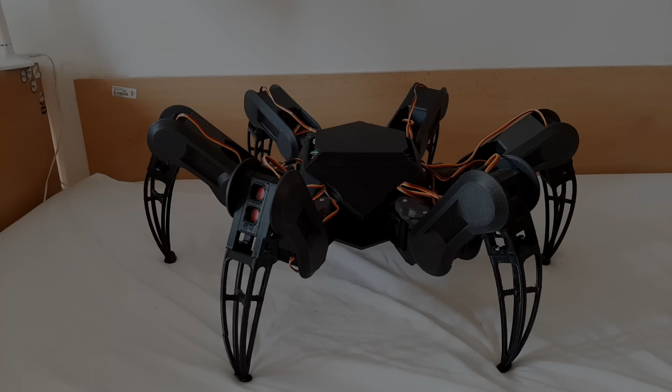This is the first robot I ever built. It's called Hexapod because it has 6 legs which allow it to walk in tough terrain. This robot took me a whole year to build, which is why it's one of the best hexapods in the world. Or maybe not, but it can do some cool stuff anyway.

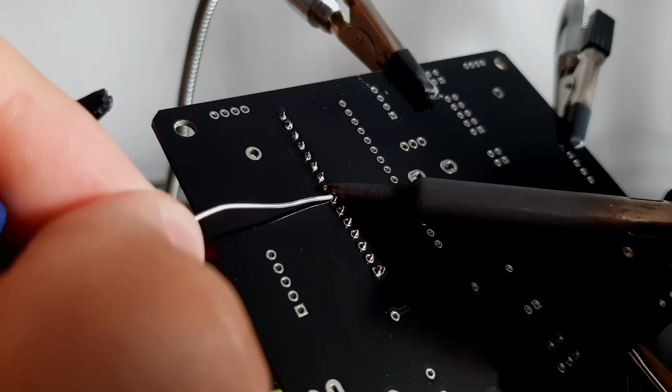I'm gonna show you the journey of this robot from day one. The mechanical engineering and electronics. You'll see the highlights, and there were even a few mistakes along the way.

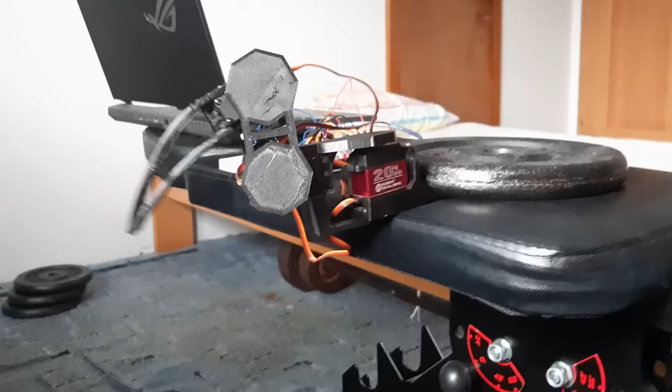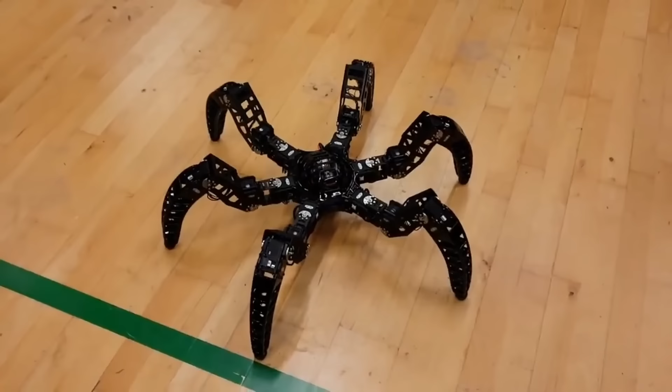Now, let's build a hexapod robot. At day 1 of the actual build, I had an optimistic view. In the next 2 months, I'm going to build a hexapod robot that's going to climb walls like a spider. This estimate turned out to be inaccurate.

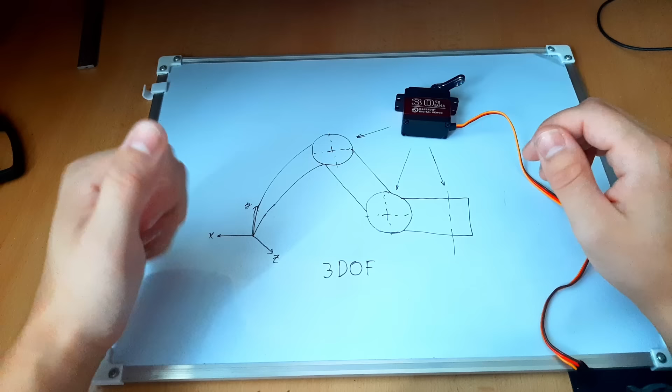I started by designing a single leg. It's gonna use 3 of these servo motors. This is the minimal amount because you need at least 1 motor per each axis it's gonna move along. I opened up Autodesk Inventor, which is a CAD software for 3D modeling.

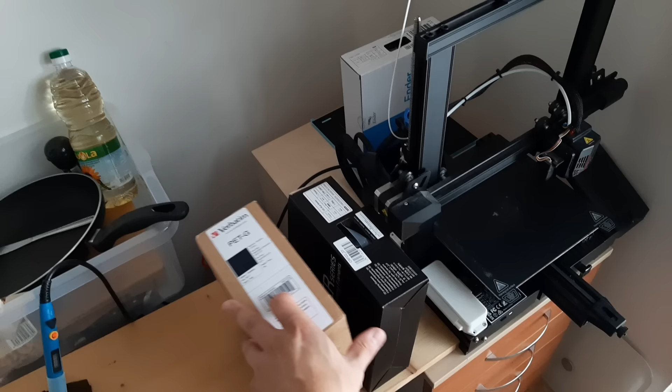After finishing my shitty model of the leg, I exported it as an STL file and opened it in Cura. I set the infill to 20%, saved the G-code and started printing. For the material I chose PETG because it's stronger than PLA, or at least so I've heard.

I glued all the pieces together and coded a basic movement. I coded the movement in angles, so the leg doesn't move straight. And I also fucked up the CAD, so one of the axes is crooked. But that doesn't really matter because it was just a prototype.

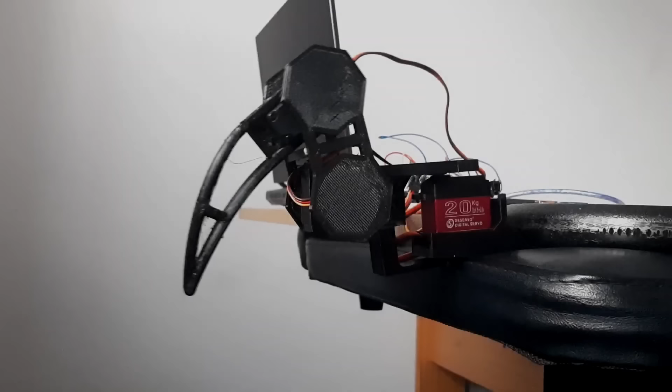At day 5, I focused on the inverse kinematics, and I'll let past me explain what that is. I built this one leg, which is made from 3 servo motors. I can set the angle of each motor and the leg will move to some position. This isn't very useful since the movement is essentially random. What I want is to tell the leg to move to some position and let the robot figure out the angles. This is called inverse kinematics.

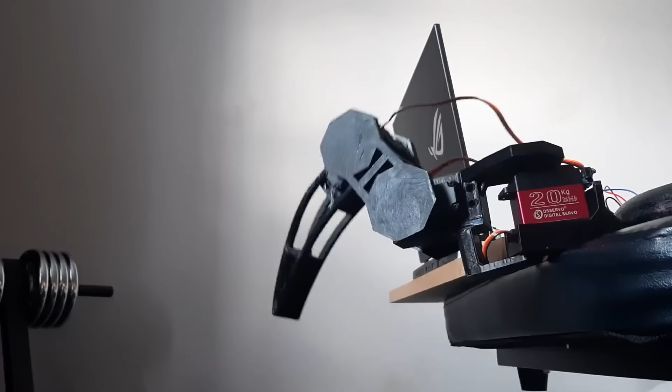I solved it by writing down the equations and transferring them into code. I can now move the leg in the X, Y, Z or any other direction I want. I have IK as a function in my code, which translates the X, Y and Z into theta 1, 2 and 3, so I can code the movement of the leg in spatial coordinates and the code translates it to the joint angles.

Since I could easily code the movement of the leg, it was time to make the leg path. So far I've built one leg which can move in the X, Y and Z axis. My aim is to combine these movements in a specific way which allows the robot to walk. I could let the leg trace out a triangle like this. The problem are these sharp corners. The leg is moving in one direction and I'm telling it to move the other way the next millisecond. This causes the motors to overload.

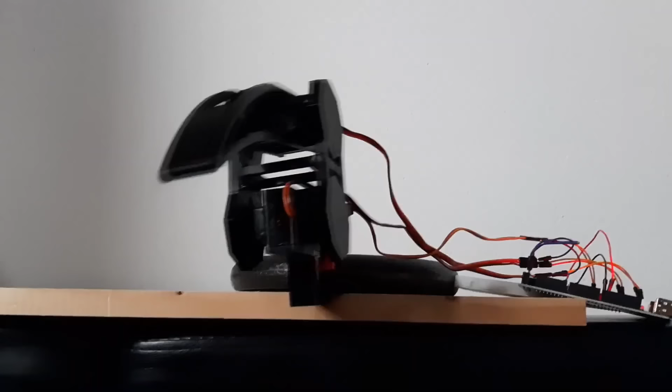Instead of a triangle, I am using this smooth path which is called a Bezier curve. This curve is C2 continuous, which roughly means that the force acting on the leg changes gradually and not abruptly. This makes the leg movement smooth and doesn't wear out the motors. In just a week, I had made a full working prototype of the robot's leg.

So at day 12, it was time to design the rest of the robot. By this time, I had already ordered another 15 servo motors.

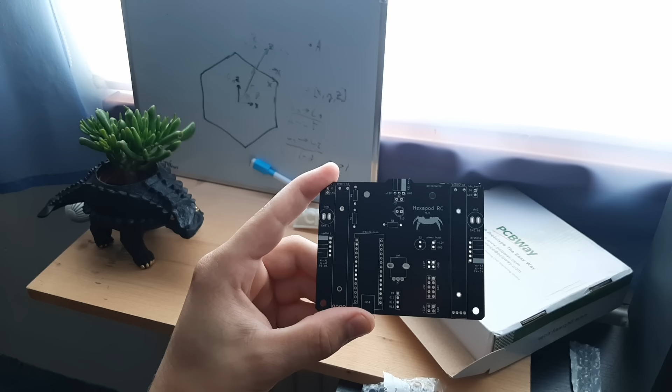The modeling took me 5 days, which sounds like a lot, but this assembly has 150 parts and they all have to fit together. This is the body of the robot where the electronics goes. I wanted to make the robot as small as possible, but it ended up being over 70 centimeters wide and now it barely fits through the door.

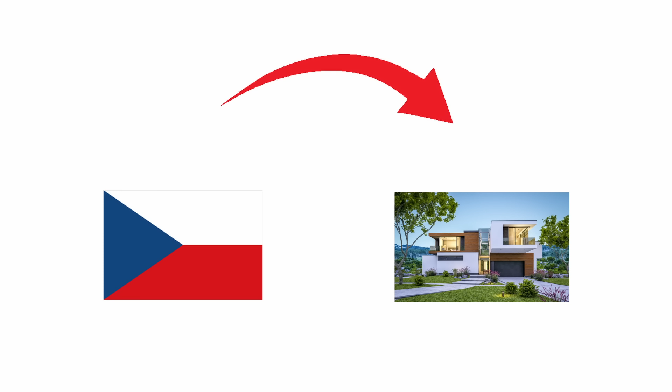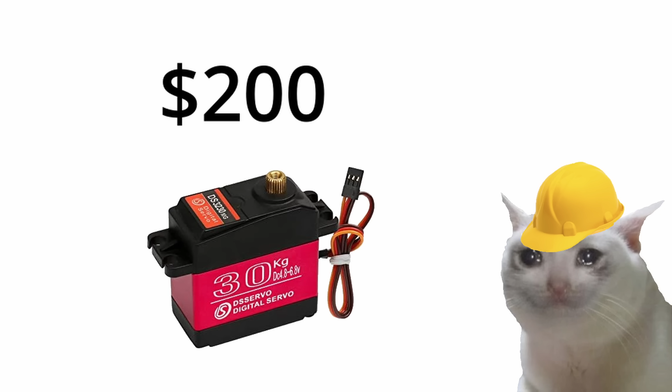34 days later, I was still waiting for the motors. You see, AliExpress ships the order to your country, this is fine, but from there it gets delivered to your home by a local delivery company. Which means I'm fucked, because in my country, the delivery company is this piece of shit. So I was just praying it would get delivered sometime, because I spent $200 on the motors.

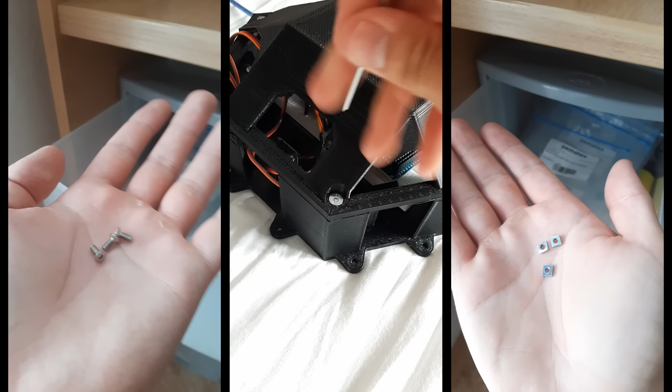While I was waiting, I printed the body and a single leg. I chose ABS because the PETG I tried before wasn't rigid at all, and ABS should be even stronger. I joined the parts together with bolts and square nuts because I didn't know that heated inserts exist. I was happy with how it looked, but it was really heavy.

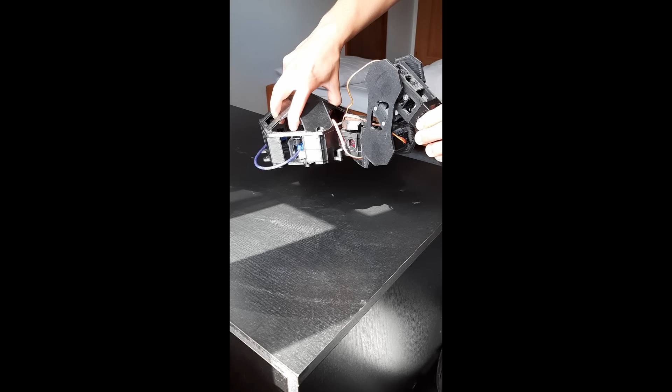I redesigned the tibia, which is this part, to add a greater range of motion. I attached the leg to the front of the robot, so I had to rotate the leg path by 60 degrees. I did this by adding 60 degrees to the first joint, which wasn't ideal since it rotated the path around that joint instead of the center of the leg path.

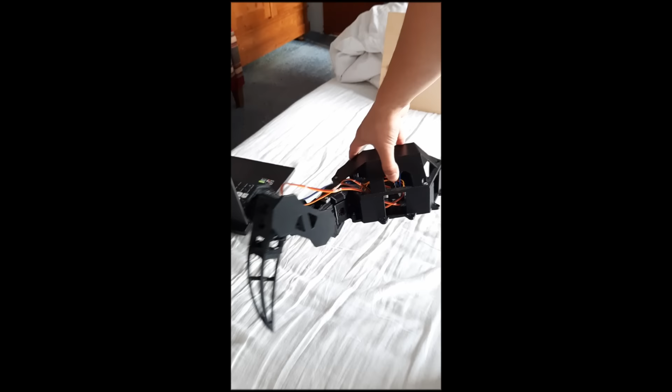I was starting to lose all hope, but at day 62, 2 months after I had placed the order, the motors finally came. I replaced the old ones, printed some new parts and assembled 2 more legs. I updated the code so it generates 2 more paths for the added legs.

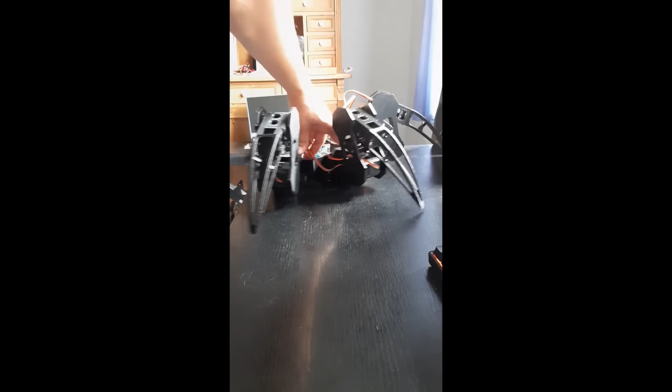I tried powering it with the notebook, but the motors draw too much current, so I had to switch to LiPo battery already. The 11-volt battery is connected to a buck converter, which reduces the voltage to 7 volts, which the motors need. I also added a switch for the battery. Next, I will properly write a code for turning the robot while printing the remaining 3 legs. Yeah, this was a scam.

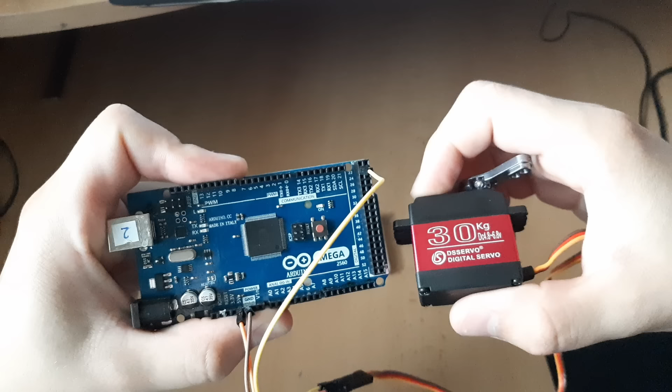Since the robot had 3 legs, I had to upgrade the power supply. Before I was using a notebook to power the Arduino, to power the breadboard, to power the servo motors. But the Arduino 5-volt pin doesn't have enough current to support 9 servo motors, so I switched to a LiPo battery. Day 95 was a pivotal moment. It was the first time I made the robot walk.

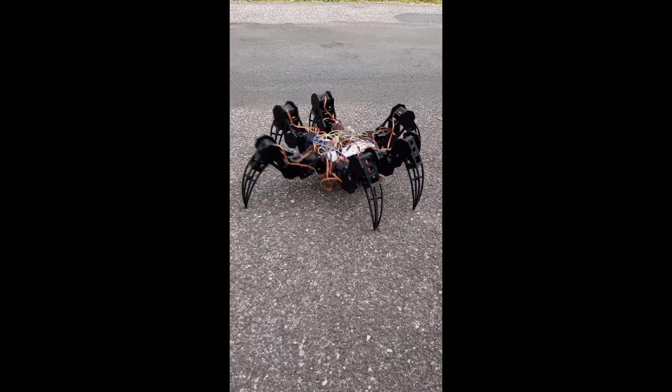I was at the hospital for the last month, but I managed to assemble the remaining 3 legs. I wrote a code to make them move and tested it. Then I printed a stand for the robot, so I can test all of the legs easily. Since I finished all the legs, I let the robot take its first steps. The robot only walks forward. It has no control system or sense of the environment yet.

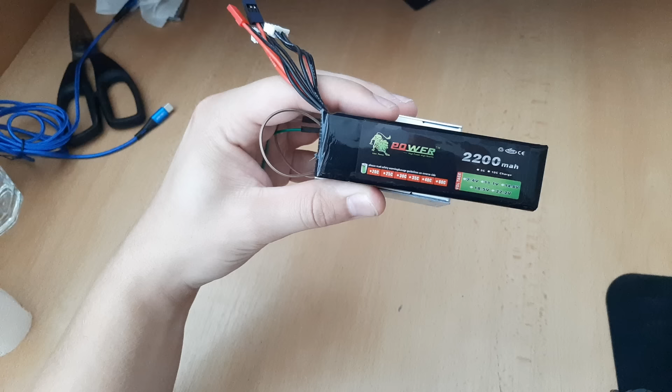It walks slowly and takes small steps, because I miscalculated the power requirement. I already ordered a battery with lower voltage, so I don't have to use the buck converter, which only provides 15 amps. The battery has plenty of power, but the buck converter has a maximum current of only 15 amps, which is barely enough for the robot to walk. The motors would also start moving randomly, or they wouldn't move all at the same time.

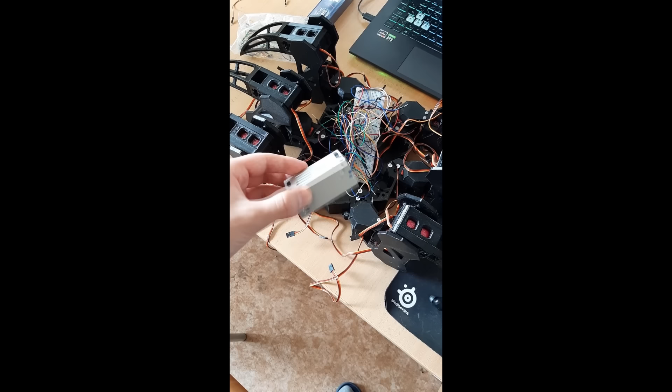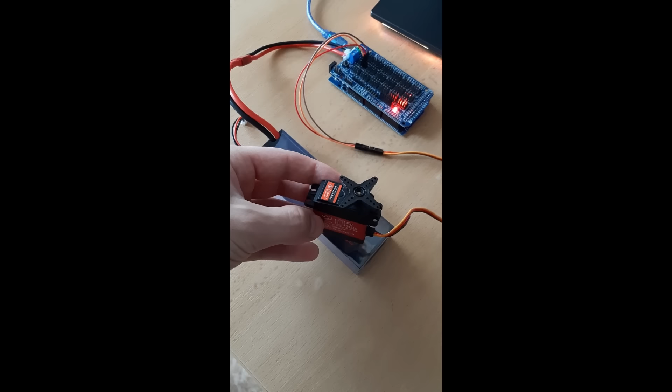At day 112, I improved the electronics. The old robot didn't have enough power, because I was using a high voltage battery with a buck converter which didn't provide enough current, so I had to redesign the circuit. I bought a 7-volt battery and connected it directly to the motors, so I don't need to worry about not having enough current. Next, I changed the breadboard for an Arduino shield, which lets me connect all of the motors easily. I also soldered a flyback diode and a capacitor on the Arduino for more stable power supply.

Now the robot can walk faster and take bigger steps. In the next video I will write a code to make the robot run and maybe add a remote control joystick. The sensor shield I added has the power, ground and digital pin next to each other, which makes it easy to connect the servos.

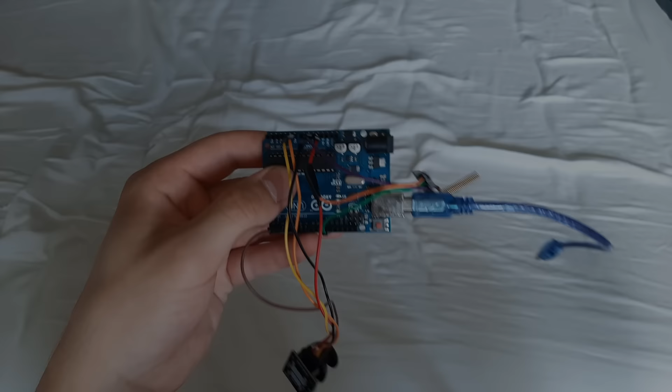Now there's still one thing I haven't talked about yet. Pretty much from day 1 I was working on a remote controller behind the scenes. I bought NRF24 chips and a HC05 in case the NRF didn't work. I assumed this was gonna be pain, but I wasn't prepared for what was to come. After weeks of work, I managed to make a transmitter with an Arduino Uno, 2 NRF chips and a joystick.

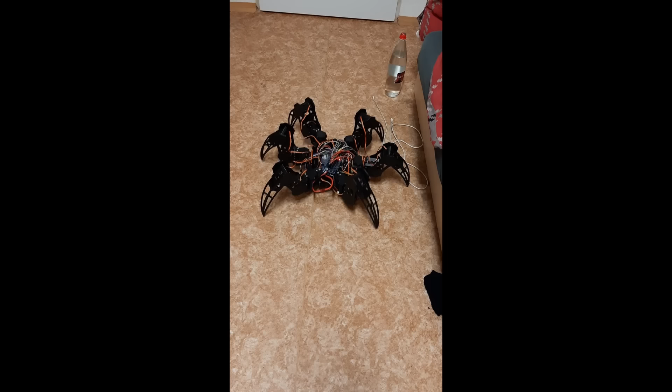Up to this point, the progress was fast. It might have taken me 100 days to get here, but I spent most of the time waiting for the motors to arrive and being in a hospital. But from this point on, it all started going downhill, and I wouldn't upload for the next 250 days.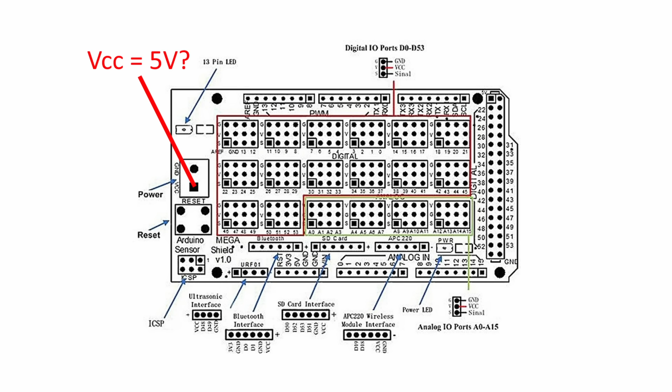The wireless communication was abysmal. It almost never worked and I had no idea how to fix it. I tried some tips from the internet, but none of them helped. Then the sensor shield blew up. I realized it was supposed to be powered by 5 volts, so it was completely useless in my case. I looked for a shield that could power 18 servomotors, but couldn't find one.

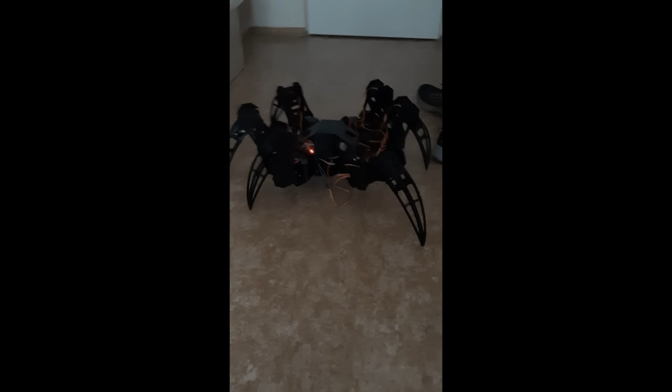On top of that, the robot started falling apart, because the 3D printed parts from ABS weren't strong at all. This meant I had to reprint the entire robot. Those were major issues, and since I wasn't even sure if I could fix them, I considered not finishing the robot.

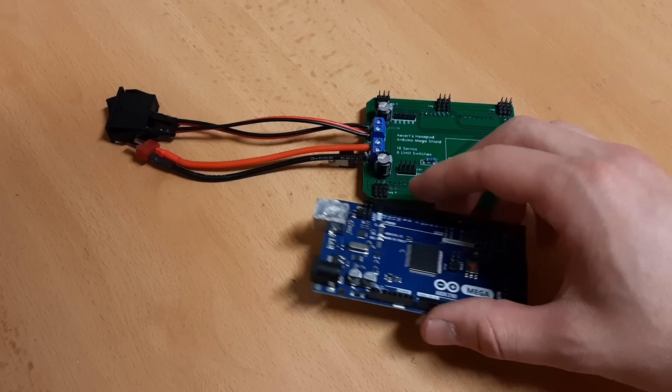But I decided to keep going. I went full sunk cost fallacy and spent a bunch of time working on the robot. I decided to make my own shield with a custom PCB, but since Aecert has already made one for his Hexapod, I just ordered his PCB and soldered it. I started reprinting all the parts with PLA and upgraded the robot's code in the meantime. I added foam to the robot's feet to prevent them from slipping.

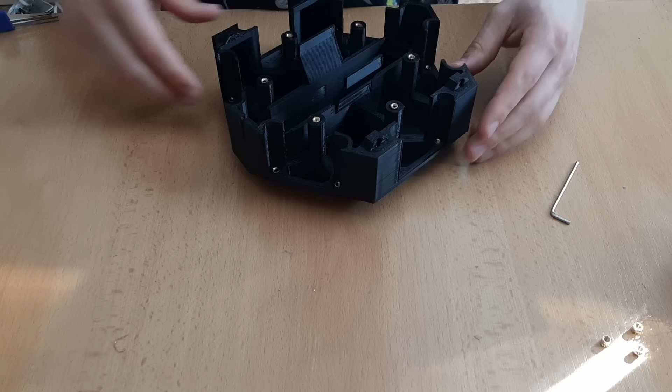I got fucked over by the delivery company even harder than before. I started using heatset inserts for the bolted joints. And I redesigned the robot's body. I spent most of the time trying to fix the wireless communication, but I was out of luck. With the newly printed parts, I was able to ramp up the speed and get a decent performance.

I got to a point where the robot was kind of working, apart from the remote controller. So I did some more coding and created a video showcasing the upgrades.

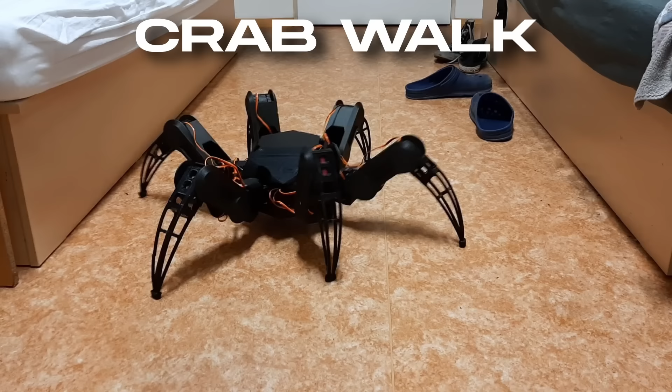Since I finally had something to show, this marked the end of my 200-day pause and I started recording the progress on YouTube again. I even managed to get the remote control working, but ever since I made the robot stiffer, the legs started vibrating.

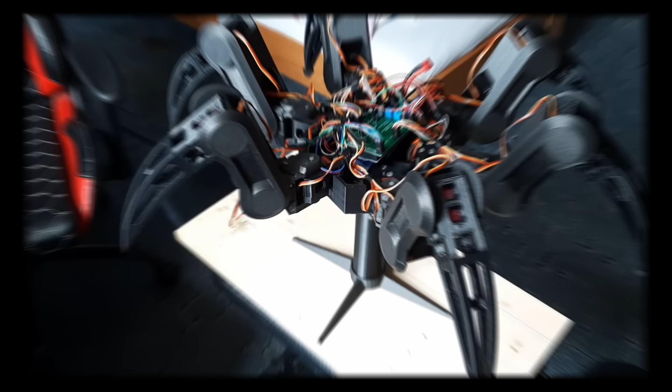So this was the focus of my new video at day 377. This is my robot I've been working on for the past year. When it walks, the legs just start vibrating like crazy and he looks like he's about to give a presentation.

To reduce vibrations, I added friction caps to the main joints. Unfortunately, they weren't strong enough. The square shaft kept breaking, so I made it bigger. This meant I had to redesign other parts as well.

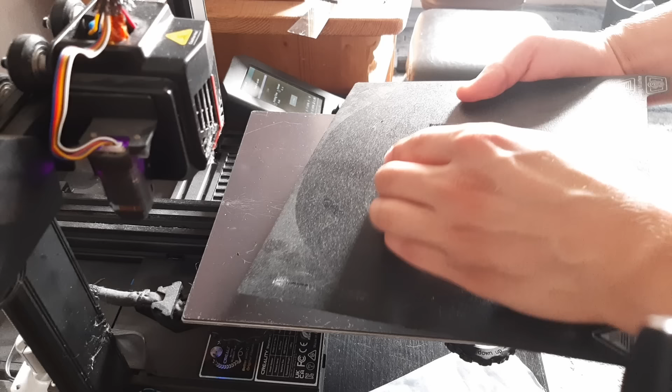And because of my shitty design of the robot, changing the parts was pure pain. I have to disassemble the whole leg just to change these 3 parts. And eventually I'm gonna have to do this for all of the legs, so it's gonna be super painful.

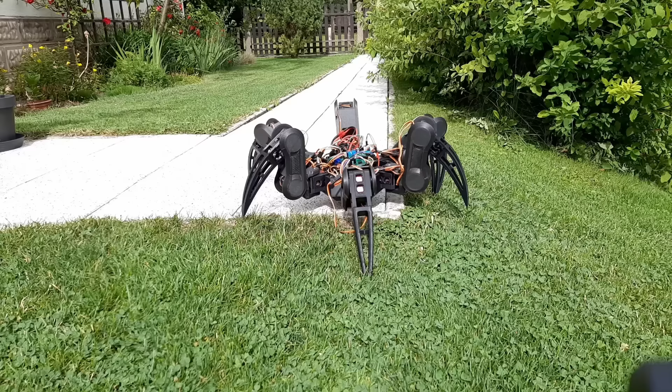Testing the new friction cap went well, but a different issue emerged. These feet are terrible. They dig into the ground and also slip. I originally had a piece of foam at the end, but it wasn't strong enough.

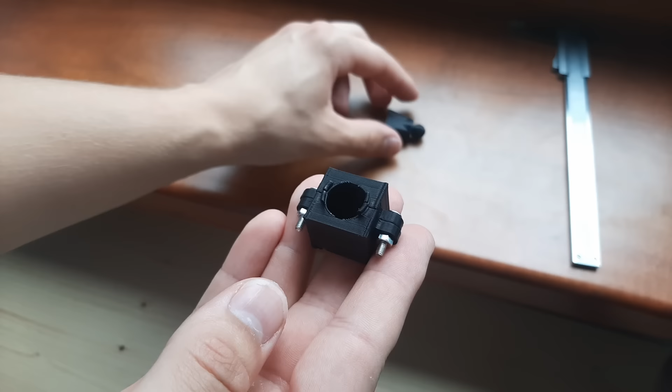I decided I was gonna make new feet from silicone, so I printed this 2-part mold. The silicone is made by combining 2 parts, A and B, and I just realized that my part B is hardened, which it shouldn't be, so I'm just gonna dilute it in some alcohol and see if it works.

So, as I said, I'm just gonna crush part B into powder. It looks like it's getting solid, so I'm gonna pour it into the mold and hope for the best.

Unfortunately, it did not solidify, so I ordered new silicone.

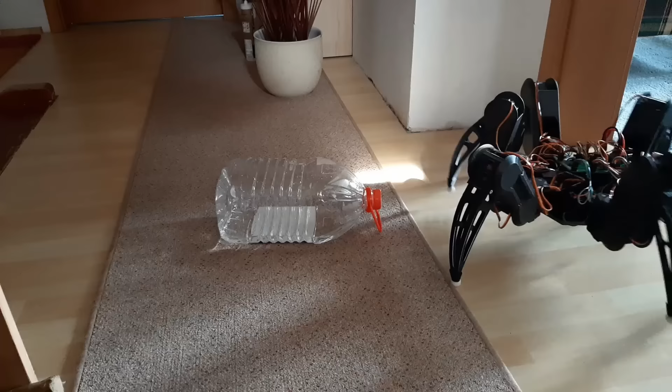With the vibrations sorted, I wanted to make a remote controller, so I made a prototype at day 393. I've been making serious progress on my robot, although I haven't upgraded the remote controller yet. This is mainly because it's perfect, but I'm gonna make some minor adjustments nonetheless, and with them the robot should be able to do some interesting stuff.

I started by making a sketch and choosing which controls I was gonna use. Then I made a CAD model of the controller, printed it, and started assembling the parts.

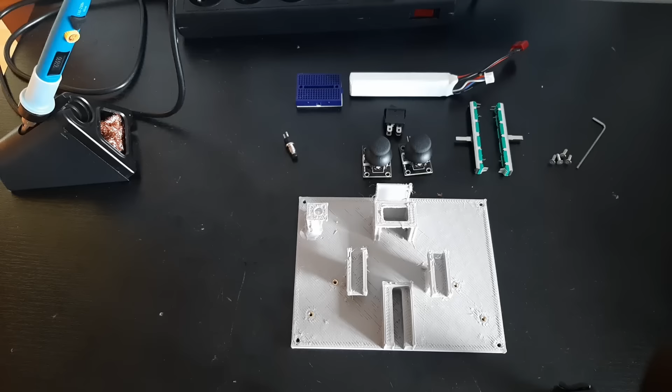Both of the joysticks are bolted to the base plate, the two sliders click into place, the button is bolted, the switch and the battery click into place, and there's a breadboard in the middle.

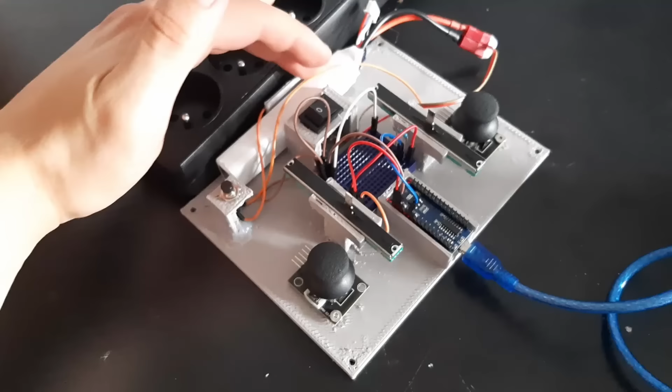Alright, the easy part is done, now I'm gonna wire up the electronics. I connected the battery through a switch to the Arduino. I added a button for changing the robot's gait. I wired up two sliders and two joysticks to control the robot's movement. And I added a 433 MHz transmitter.

If this isn't the best looking controller you've ever seen, I don't know what is.

After a few painful hours, I managed to connect the robot to the transmitter. You control the movement of the robot with the right joystick, and with the right slider you control the height of the robot. If you move the left slider, you control the radial distance of the legs. Now I'm gonna change the gait, and you can see he walks differently - he lifts the legs one by one. And now I've changed it back.

The silicone I ordered last video came, so I could finally finish the feet.

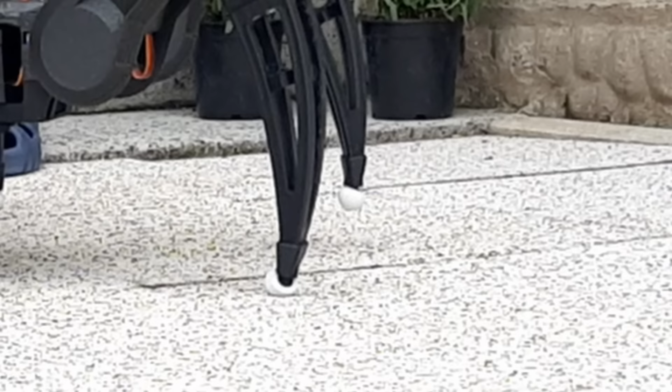Let's see how he walks with his new feet. Fuck.

At least my dog likes them. I applied super glue to the feet and they ended up working well.

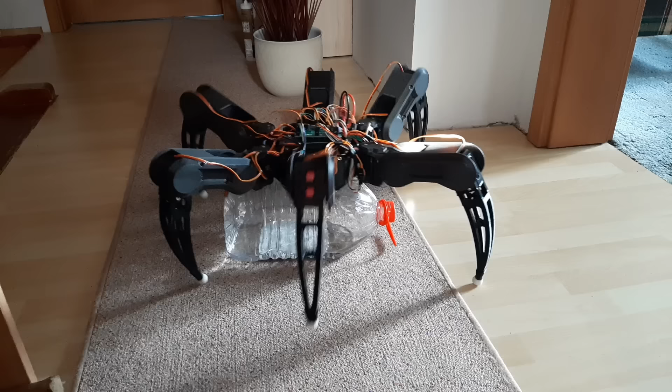At day 444, I added the most exciting update yet. Today I'm gonna take all my engineering knowledge and teach him how to high five.

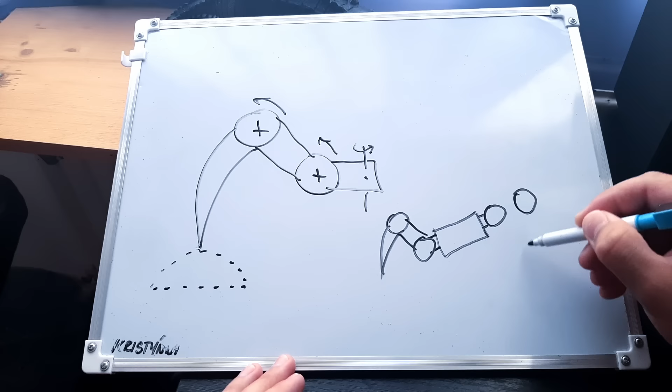Have you ever wondered how this robot walks? Each leg moves in a straight line, so the robot goes forward, and then it lifts up and returns to the starting position. I had previously generated the leg path by manually coding it, but now I was gonna do more advanced movements. I decided to animate the robot in Blender, so I didn't have to manually code each leg.

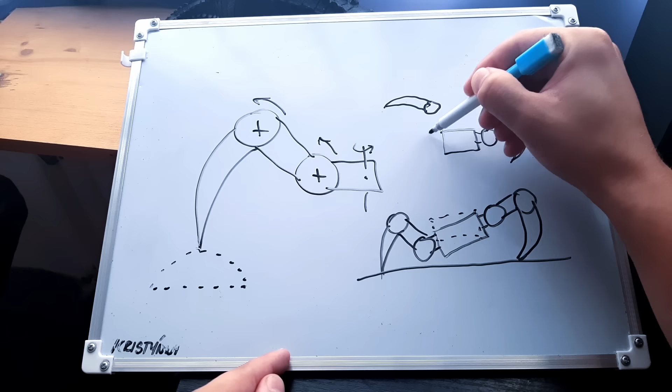To recreate my robot in Blender, I started with a leg. I first modeled the three links. I created an armature to define the linkage. I added inverse kinematics to make the leg move. Finally, I modeled a body and copied and pasted the leg 5 times.

Then I was able to animate the robot. You can keyframe the location, go a few frames into the future, move the robot somewhere, keyframe it again, and then when you play it back, the robot moves.

I made this animation, and then I wrote a script that saves the positions of the legs. It generates a text file with all of the positions. Then I just take this and paste it into my main Arduino code, load it to the robot, and it does exactly what the animation does. So instead of generating curves for each leg, I just do this animation and then paste it into the main script. I had planned to make the robot dance, but there was a difference between the simulation and real life.

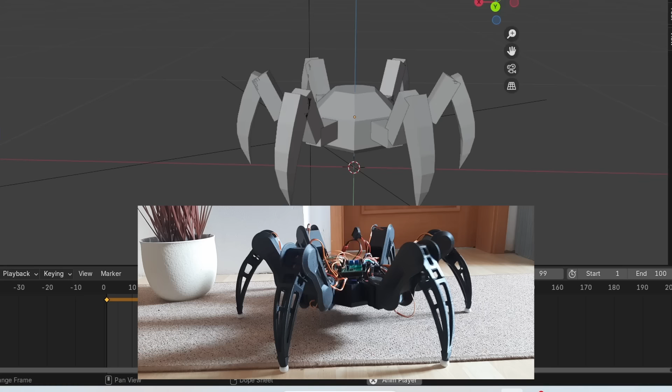So I opted for a simpler animation.

But there was still one thing I had to take care of first. I control the animations of the robot with this controller, and don't be fooled by the beautiful design, it's actually pretty shit. It only has one button and I need at least 3, so I'm gonna upgrade the controller and then I'm gonna make him high five.

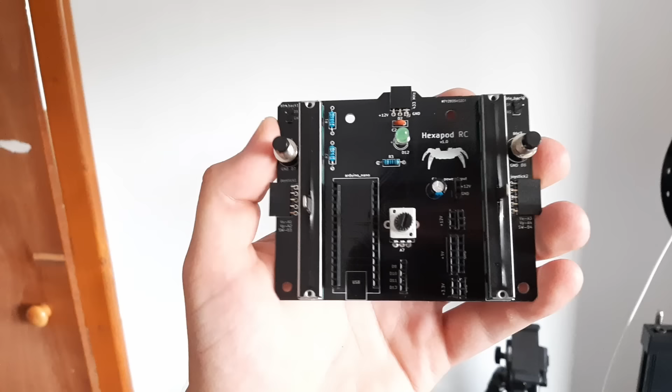These helping hands are great. Man, I hate soldering, but this is cool. Dope.

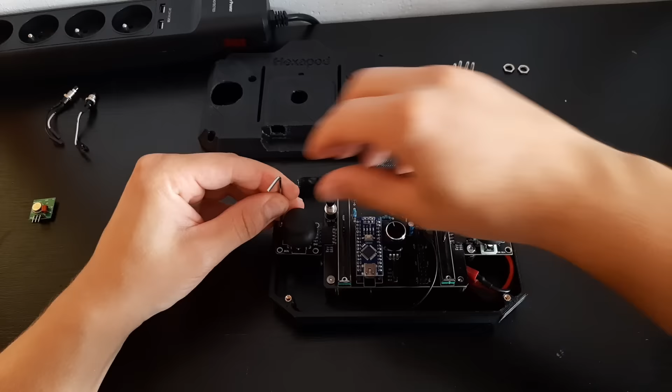Alright, let's make some animations.

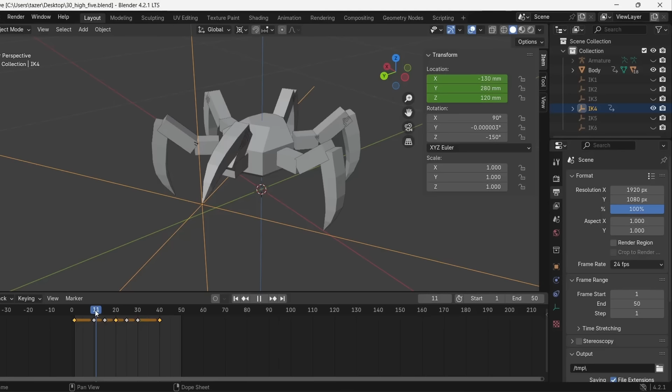For the high five, he just lifts up his leg, waits for the hand, and then executes the high five. To make the robot dig, he's gonna sit back like this, then dig into the ground with his two front feet.

Alright, let's have some fun.

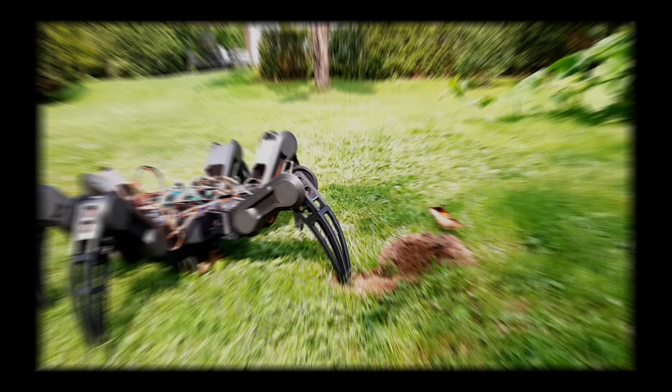It's been a long journey, but we have finally reached the end. These are the most recent clips I filmed when I took the robot shopping at day 440.

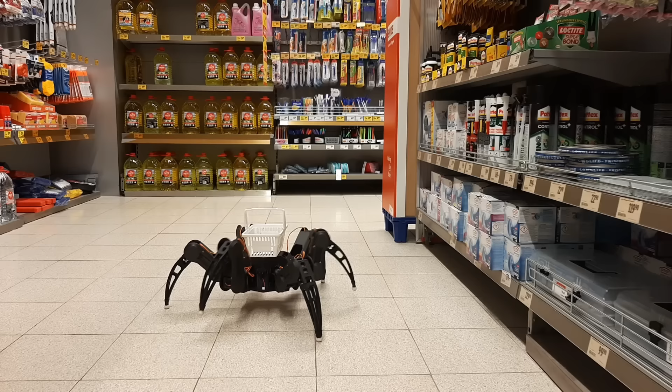This was my first time using an Arduino, 3D printing, and generally building a robot. It took over a year to build, and apart from some exceptions, I really enjoyed it. I planned to do so much more with the robot, but after some consideration, I decided it was time to retire it.

I'll explain why I retired the robot in my next video. Now let's zoom out, look at the biggest challenges, and what I would do differently.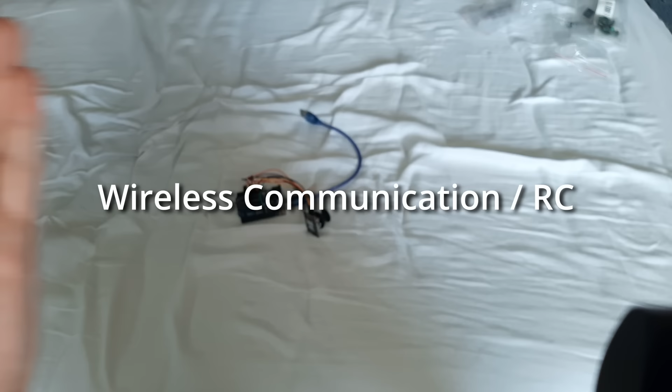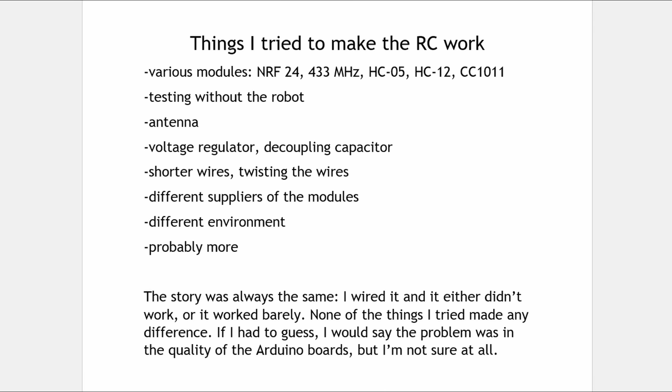Wireless communication. This was the biggest bottleneck of this project. I spent so much time on it that it hurts to talk about. The best I got was an RC that occasionally worked within a 2-meter range. I tried many things but never got it to work. I'll try using ESP now for my future robot since I've heard it's not completely shit.

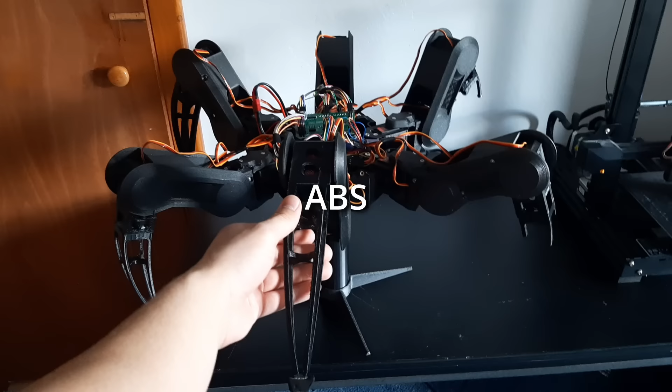Weight. The robot weighed 5 kilograms, which is 2 kilograms more than I had planned. ABS. I had printed the robot in ABS, which prints terribly on Ender 3. This paired with the high weight resulted in mechanical failures of almost all the parts.

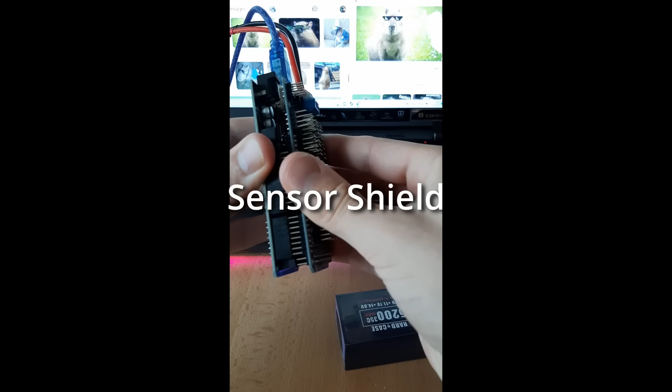Sensor shield. I hadn't checked the wiring diagram, which would have told me it wasn't usable in my situation. Non-iterative design. I hadn't tested the robot properly and built the first design I had in mind. I then had to reprint the entire robot.

Modularity. I had designed the robot to have as few parts as possible. Then, when I needed to change one part, I had to take apart the whole robot.

Hexapod's PCB. There was a short circuit somewhere in the Hexapod's PCB, so I couldn't upload the code when the PCB was connected to the Arduino. This made it a nightmare to code the robot. Vibrations. The servos vibrated a lot, which caused the bolts to unscrew.

Compliance. The robot had no compliance, so when the robot's leg caught something, the servo broke. Upper body. I had put the cable holes in the upper body, so when I wanted to open the robot, I had to take out all the cables first.

Now I'm gonna talk about what I've learned and some tips I would have used. When prototyping, design everything as simple as possible. You can improve the aesthetics and optimize once you have a working prototype. Make the design modular so you don't have to disassemble the whole robot to change a single part.

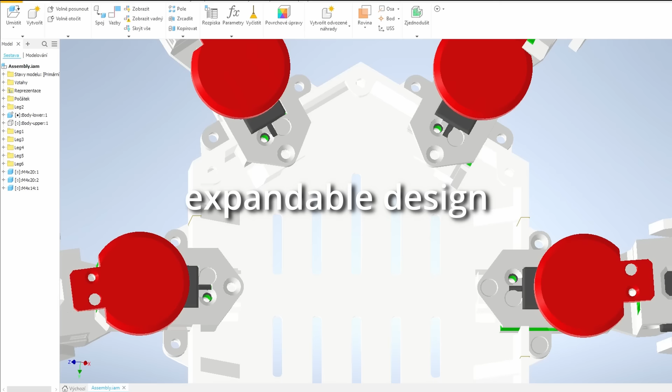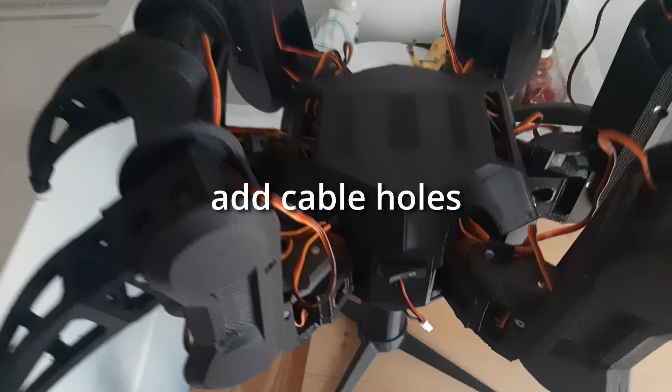Make the design expandable. For example, add mounting holes for attaching things in the future. Make it easy to access the main parts like motors and the electronics. Add a hole for the Arduino cables so you can code the robot without disassembling it.

Don't print in ABS if you don't have a printer for it. Use thread locker to prevent bolts from getting unscrewed.

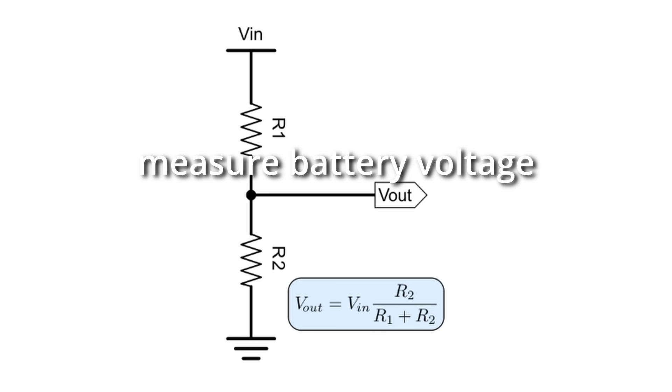Make a voltage reader for your battery first, so you won't destroy it by draining it. Make custom PCBs. You'll save yourself time and have the electronics more ordered.

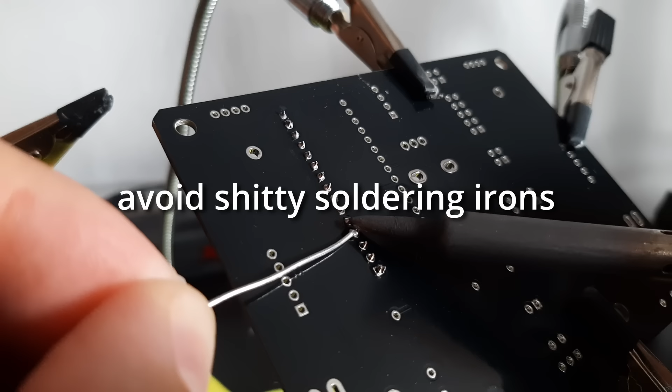Don't buy the cheapest soldering iron. You'll save time and energy. Also use flux and helping hands.

Make the code easy to read. Use comments a lot. Use functions, don't repeat code. Give variables and functions meaningful names and explain them in comments. Document the code. Write roughly what the code does at its beginning or in a text file.

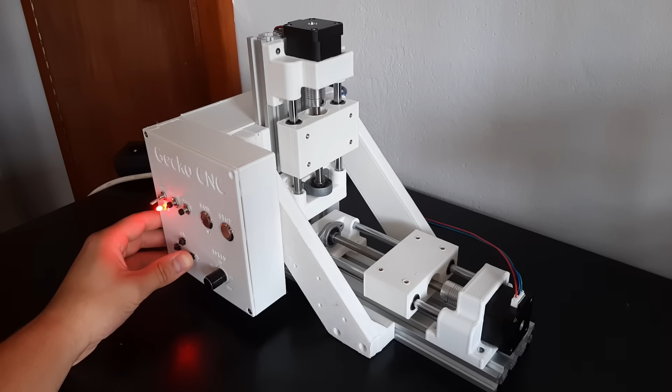I've learned a lot and will definitely make a video in the future to finish what I wasn't able to this time. But now I want to make a different robot and work on my other projects.